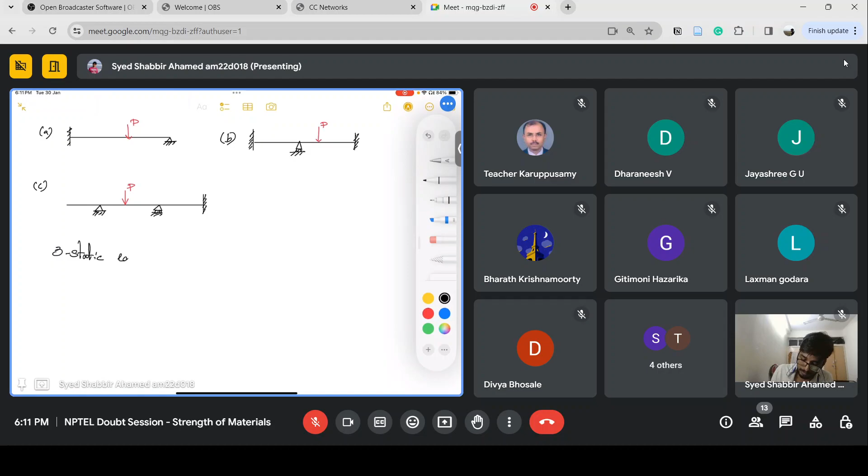So in any beam, since these are all 2D structures, for a 2D structure we'll have three equilibrium equations, three static equilibrium equations. First is sum of the horizontal forces, sigma Fx equals to 0, sum of the vertical forces, sigma Fy equals to 0, and sum of the moments should be equal to 0. So if all these conditions are satisfied, we can say that the structure is in static equilibrium.

So it means that the structure is not moving when the load is applied. So that's static equilibrium, and this is for 2D.

Suppose if we have a 3D structure, then we will have six number of equations: sigma Fx equals to 0, sigma Fy equals to 0, sigma Fz equals to 0 for forces, and sigma Mx equal to 0, sigma My equals to 0, sigma Mz equal to 0 for moments. So we'll have a total of six equations in case of a 3D structure. I don't think we'll be seeing any 3D structures during the course.

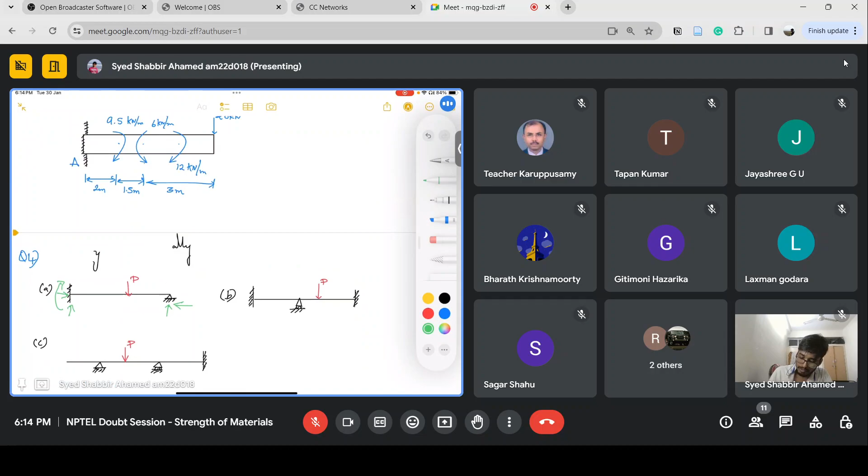So it is not sufficient for this structure to only have static equilibrium equations. That's why this structure is called an indeterminate structure. Total number of reactions is 5, whereas the number of equilibrium equations is 3. So we need additional equations to solve this structure to find out the shear force, bending moment, or the deformation of the structure. That's why it is called a statically indeterminate beam.

So the second one, can anyone tell me how many reaction forces are present for the B type of structure? This part B, this beam. You can see the screen, and if you have notes, you can draw and let me know how many reaction forces are acting on this structure. If anybody has any answer, can turn on your mic.

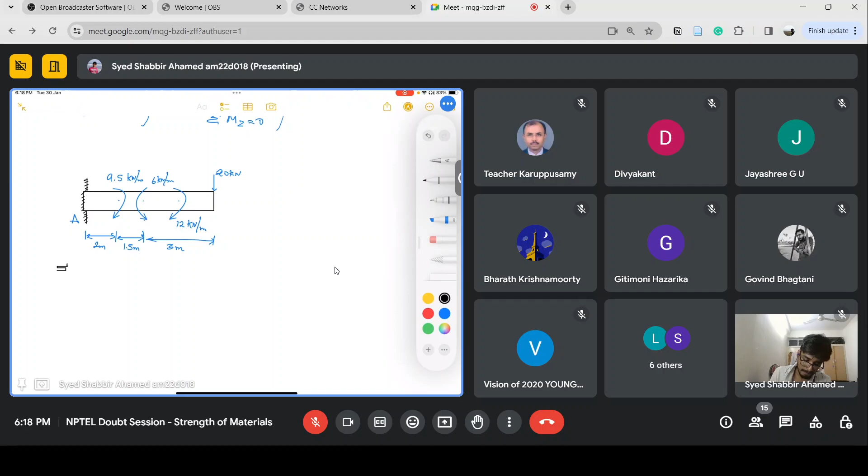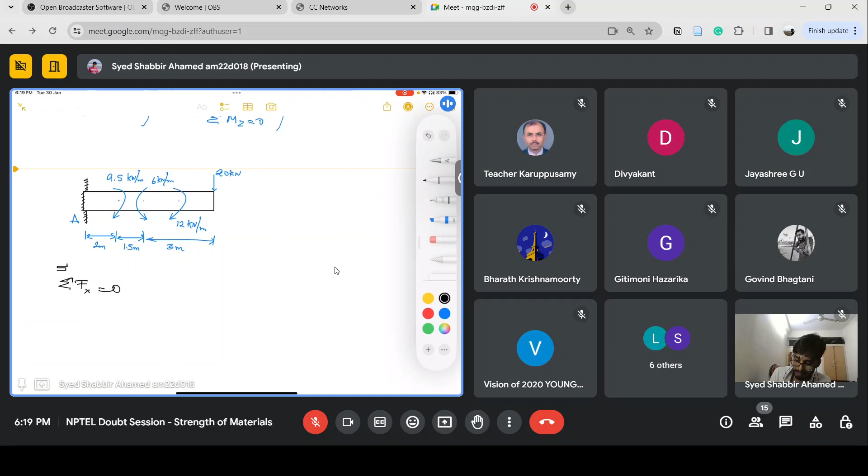So this is a structure, and here we have to find out the net reaction, moment, and force at the support. Let's start with the first thing we have to do. Because this is a 2D structure, we will have three equilibrium equations: that is sigma Fx equals to 0, sigma Fy equals to 0, and sigma M equals to 0.

This is actually moment in the z direction, so you can say sigma Mz equals to 0. Let's say this is the plane of the structure, so this is in the xy plane. If I apply any moment, this moment will be about the axis which is inside the paper. If you say the screen is the plane, you can see this pencil represents the z axis. So the structure will have moment with respect to this axis. This axis you can't see in the paper; it will appear to you as a point. So that's why this moment is moment about the z axis, hence sigma Mz equals to 0.

Here, because we don't have any horizontal forces in the structure, you can simply remove this equation, or you can keep it, depending on the sophistication you want. We can simply remove this because there aren't any horizontal forces acting on the beam. So you can simply say this is not required. But if there is any inclined load acting on the beam, or any horizontal load acting on the beam, then we will require this equation. But if you use it anyway, you'll still get the correct result.

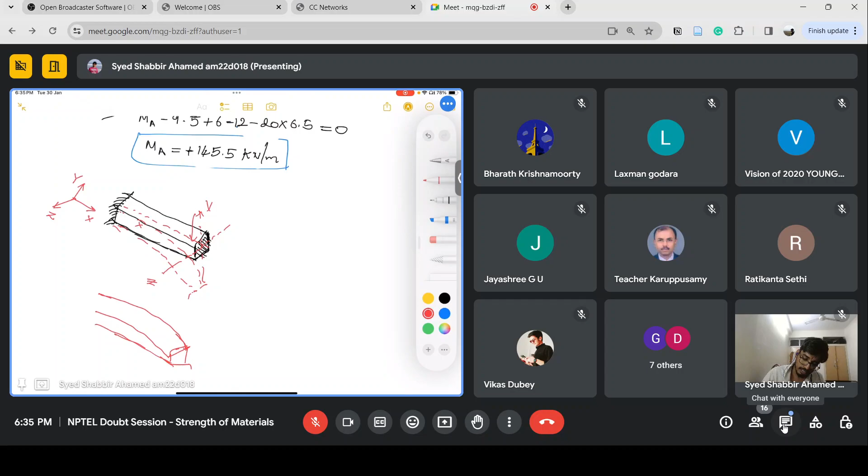Or let's say if I take this same thing in 2D, so this is the cross section initially. After the beam has been deformed due to the applied load, the beam will rotate like this, right? So here you cannot see the z-axis, but here you can see the z-axis in the 3D. So this is the z-axis. If I am applying any load, this cross section is rotating about this z-axis.

So that's why the moment here is taken in the z direction. I hope this diagram is clear.

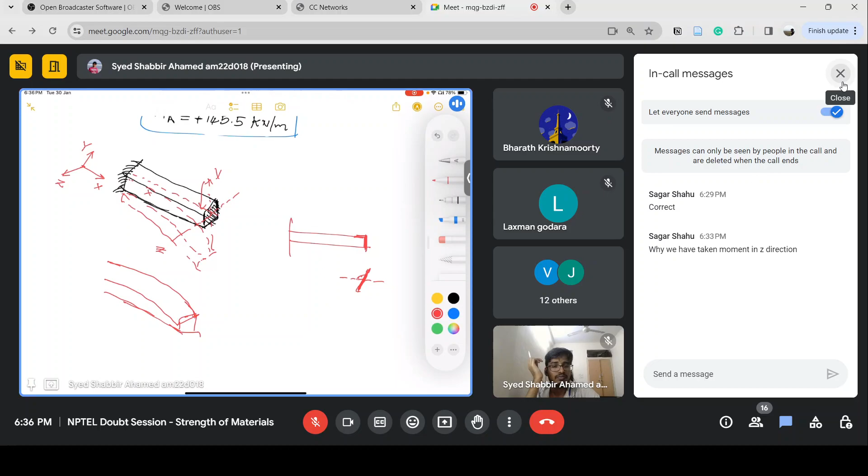Are you getting it, Sagar? Sagar Sahu... yeah, just try to imagine it.

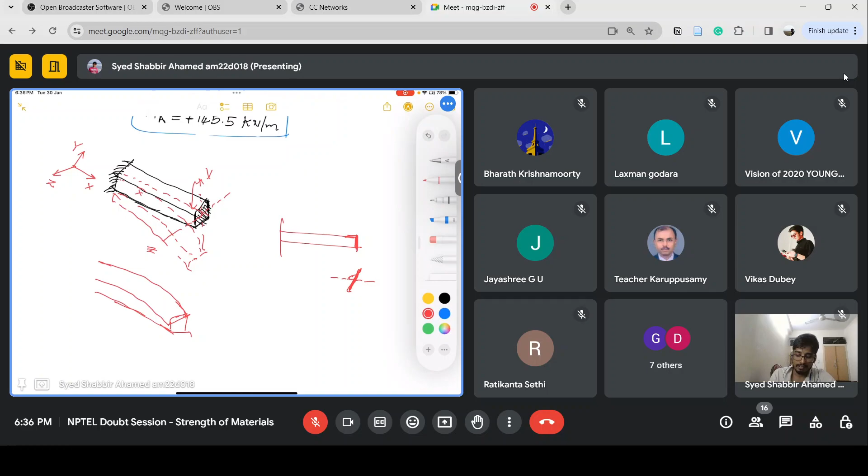My diagrams, I think, are not that good, but I'll try to improve during this course. This is the first time I'm using an iPad, so I think I'll try to improve. So I think you got it, like why we are taking the moment in z direction.

So here you can't see it, the z-axis in a 2D structure you can't see. This is the point here. So the z-axis goes through this point. And the beam bends in this direction, so it is bending around the z-axis. That's why we take the moment as moment in z direction.

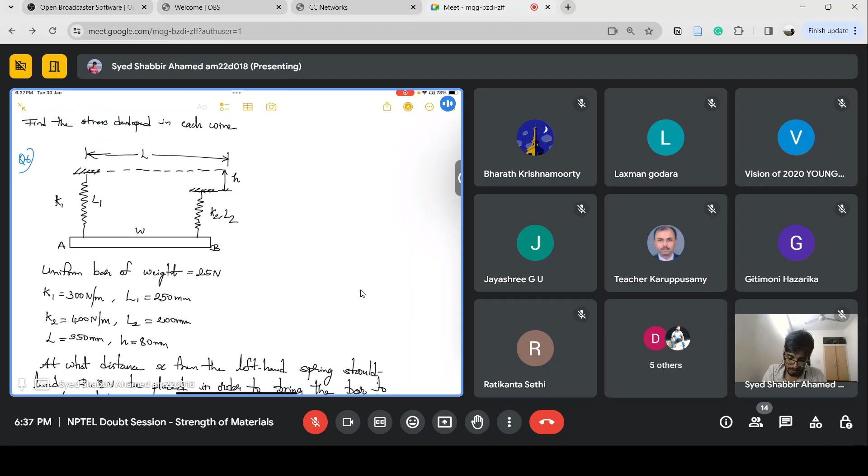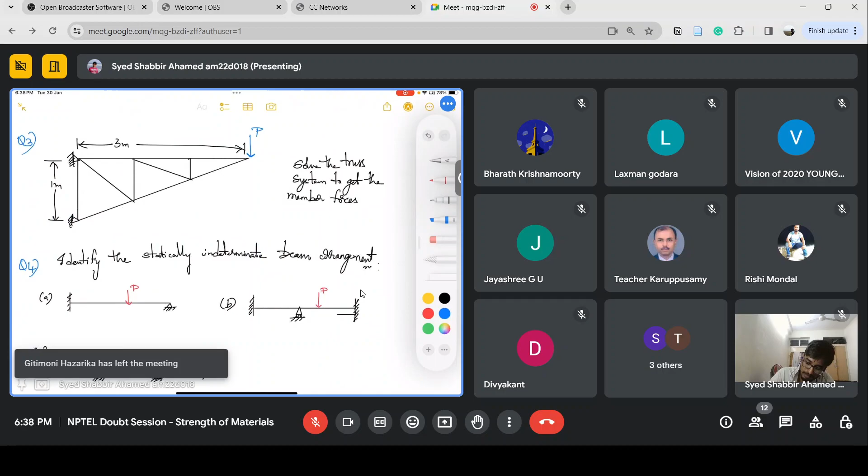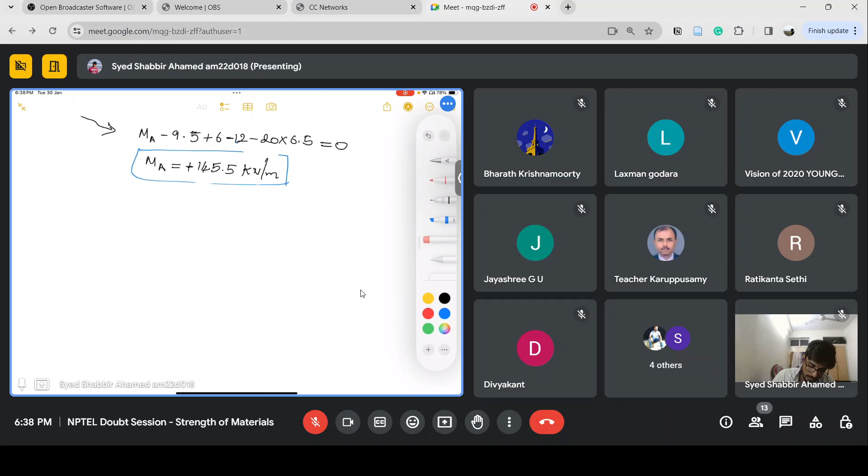Okay, so I think we'll go with this question. Second one, just copy this. So the question is here, we have to get the... so here we have to find the shear force diagram and the bending moment diagram.

So I hope you all know the concepts of shear force and bending moment, and you might have watched week one. So I'm directly going to get this. So before trying to get the shear force or bending moment diagram, we have to first get the reactions of the structure which are acting on it.

So at the support, there are two supports, B and C. So we have to get the reactions at B and C. So here we have a hinge support. A hinge support will give us two reactions. One is a horizontal reaction.

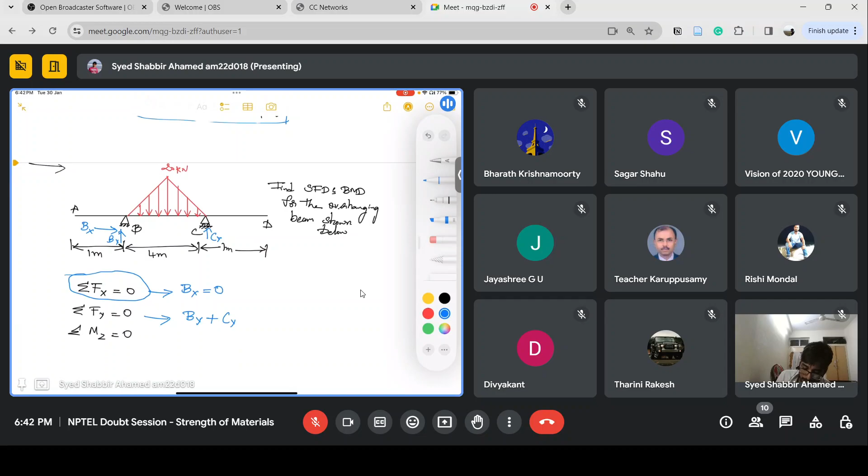There are three vertical loads which are acting: this By reaction at B, reaction at C which is the vertical reaction at C, and this uniformly varying load which is acting. Because the load is acting in the downward direction, we have to take this as a negative load. And there is a small correction here.

This is not 20 kilonewton, it is 20 kilonewton per meter. This is because this is a distributed load, that's why I am taking it as 20 kilonewton per meter.

It is acting in the negative y direction, that's why I'm taking it as negative, and I want to get the total load acting on this structure due to this uniformly varying load. I have to get the total area of this triangle. If I get the total area of this triangle, I can get the total load acting on the beam, because this is a triangle.

Area of a triangle, you can write it as half into base. So this is the base, which is 4 meters, and the height of this triangle is 20 kilonewton per meter. The unit of this is meter, and the unit of this is kilonewton per meter. If I multiply both of them, the meters will cancel and I'll get the load in kilonewton instead of the uniformly varying load.

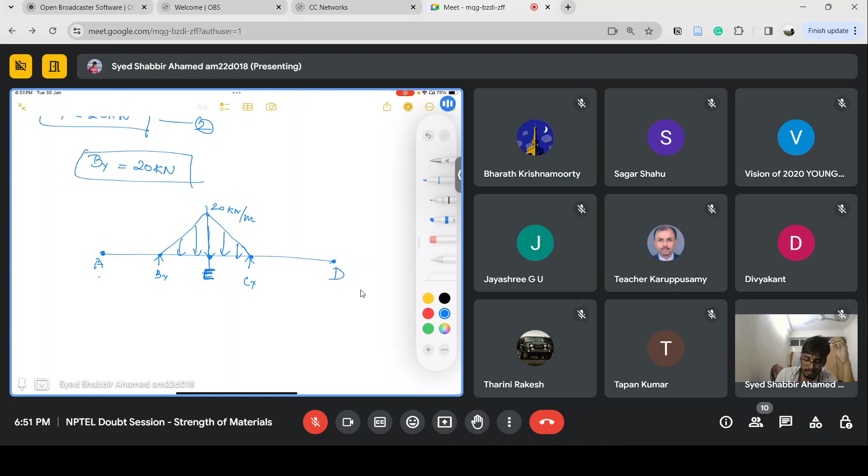Here we will find out the variation first in section AB, then we will go to section BE, then section EC, and then section CD. This is because there will be jumps occurring in the shear force diagram at the point where there is load acting, and there will be a jump occurring in the bending moment diagram at a point where there is a moment acting.

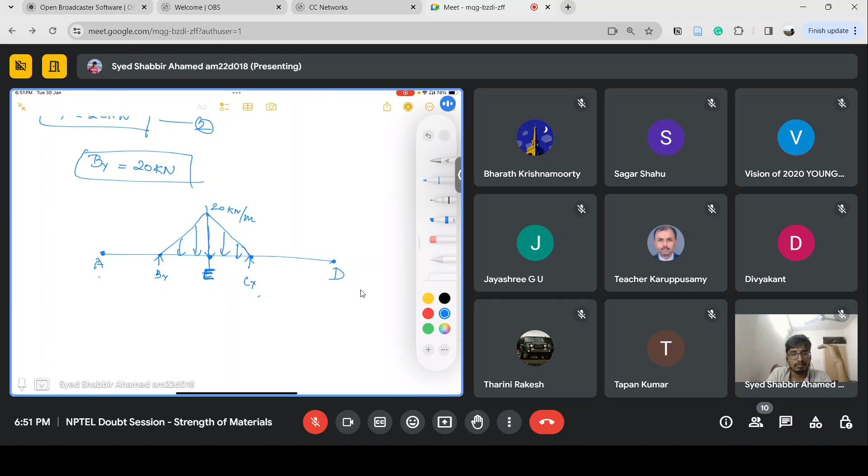In order to take account of that, first we have to take a section in the segment where there is no variation. So if from A to B there is no load acting, I can take a section here and find out the shear force and moment diagram.

Whenever you come to B, there is a load acting here due to the reaction, so there will be a change in the shear force diagram. That's why you have to take a section again here between B and E. From B to E, there is a variation from 0 to 20 kilonewton, so this is one kind of variation.

So you have to take a section here. Again from E to C, there is a variation of 20 to 0, so again you have to take a section like this. We have to divide this into segments, and do the shear force and bending moment calculations.

Let's say first we will take the section AB. First I'll go with all the shear force calculations. So, shear force variation in AB.

In AB, if I take a section here, I'm just cutting a section. So from A, this is the section I have cut. There are no forces acting here, and there is no reaction at point A.

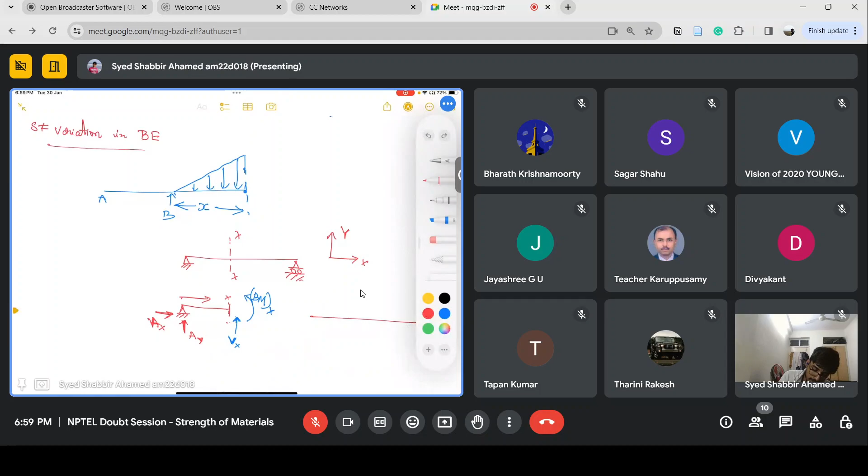So suppose if I take the section again like this. Before this I had taken this section, and now I am taking this section, so I have cut the beam into two parts. This is a roller support, and because from here I am going in the negative x direction and cutting the section, this is called negative face.

That's why we are going to use this. The reaction, I am assuming it is acting upward, that is positive. Because when we are going in the negative side, we are going to assume that shear force is acting in the negative direction, since this is negative face, and the bending moment is also acting in the clockwise direction. So we are going to assume like this - this is negative face, and we take the shear force and bending moment in the negative directions.

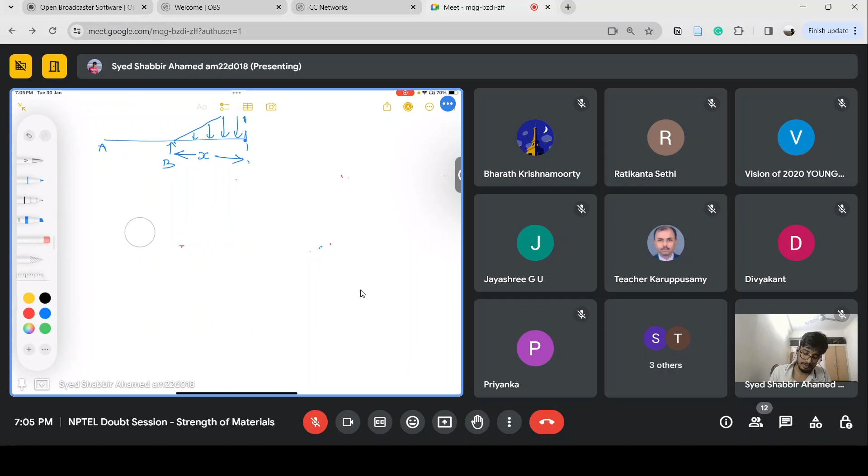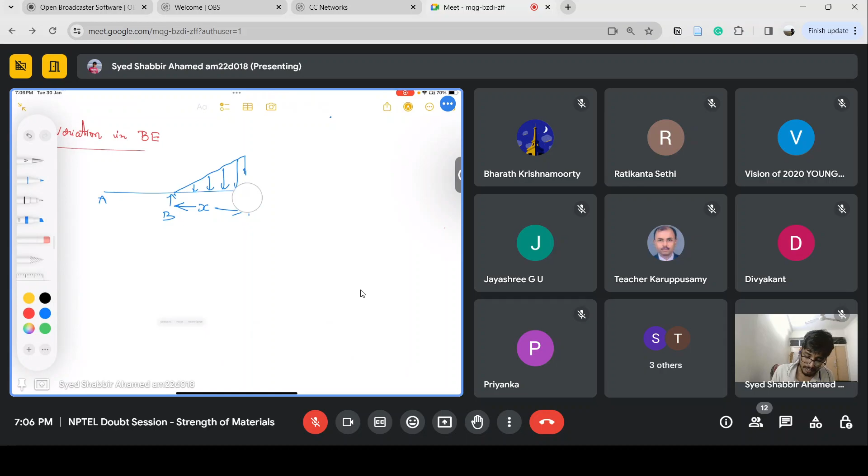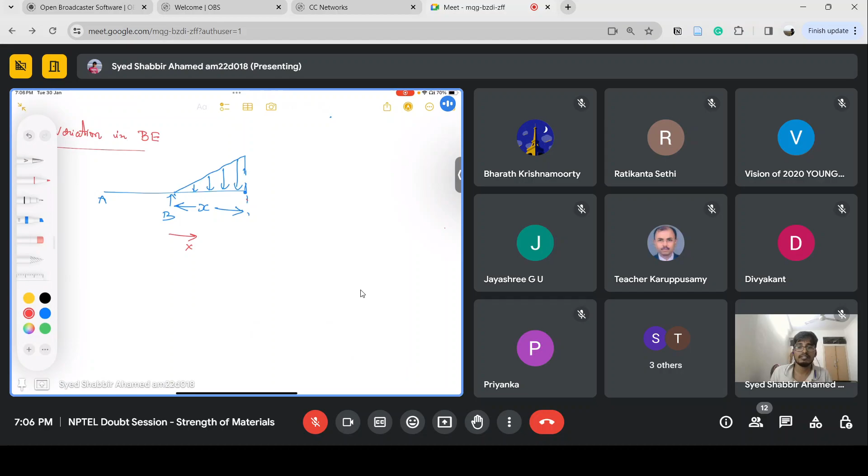In this problem, I have cut the section here, and because I'm coming in the positive x-axis direction, I'm cutting the section here. That's why this is the positive face, and in the positive face, I'll take shear force as Vx and bending moment as Mx. So I'm just going to calculate the shear force, and then the bending moment at x. These are the directions which I'm taking.

So what is shear force? Shear force at any section is the sum of all the forces acting on the structure till the section which we have cut. So till x, whatever is the sum of all the forces acting, that is called the shear force.

So in order to get shear force, we have to take sigma Fx equals to 0 for this cut section. We have only By here, and we have Vx also acting in the upward direction. That should be equal to 0. In addition to this, there is also this load.

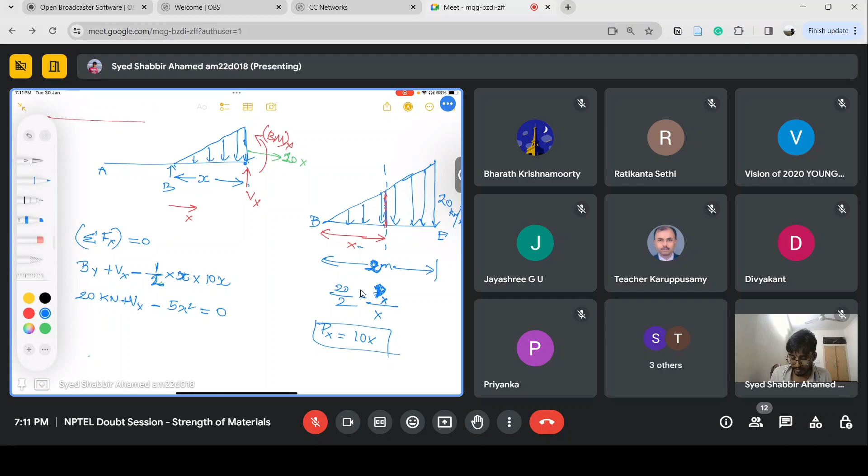So you can get, by what we have already calculated, 20 kilonewton plus Vx minus 5x square. So if you take this, Vx equals to 5x square minus 20 kilonewton.

Is this clear? I think it should be, otherwise you can ask me. So this is the shear force variation in the section, in the segment BE: 5x square minus 20. So from B to E, this is the shear force variation.

Let's say you want to calculate the shear force at E. Since it is at a distance of 2 meters from point B, I'll substitute x equals to 2, and I get 5 into 4, which is 20 minus 20. So the shear force at this point is 0. I hope you have understood this — this is the shear force at point E.

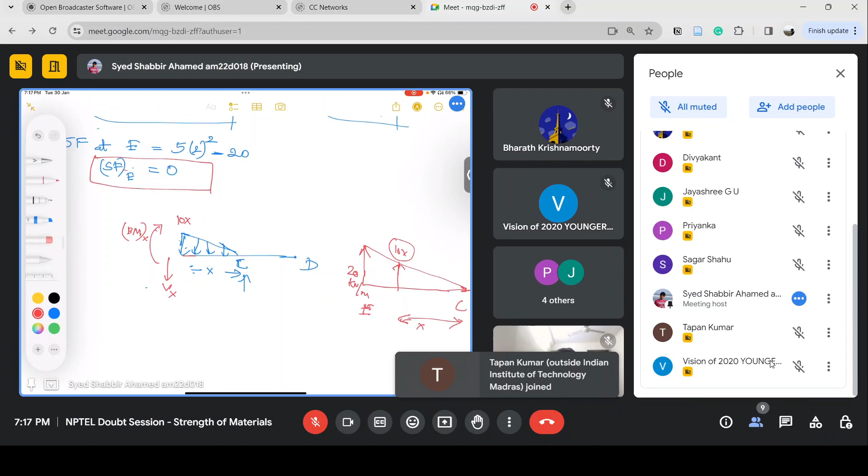So again I am going to take sigma Fy equals to 0. Again, I am taking Cy acting upwards, and there is Vx acting in the downward direction, and there is half into 10x into x. So if I substitute Cy is 20, I'll get 20 minus 5x square, which is the shear force at section x.

So this is the shear force variation which we have got in the section C and E.

So if I want to calculate the shear force at point E, I'll just substitute, and I'll get shear force at E equals to 0. So at any point on the beam, shear force should be the same. But there can be a jump, so if there is a load like a point load, there can be a jump.

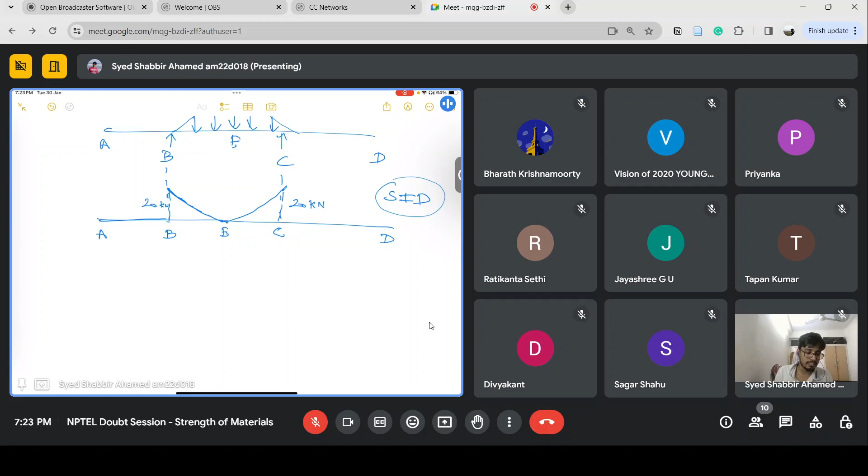So now coming to the bending moment, as I have explained, I don't need to calculate between segment AB and CD, because there if I take a section there are no loads acting, no forces act, no reactions present. So the bending moment in that part will be 0. So we don't need to do that again.

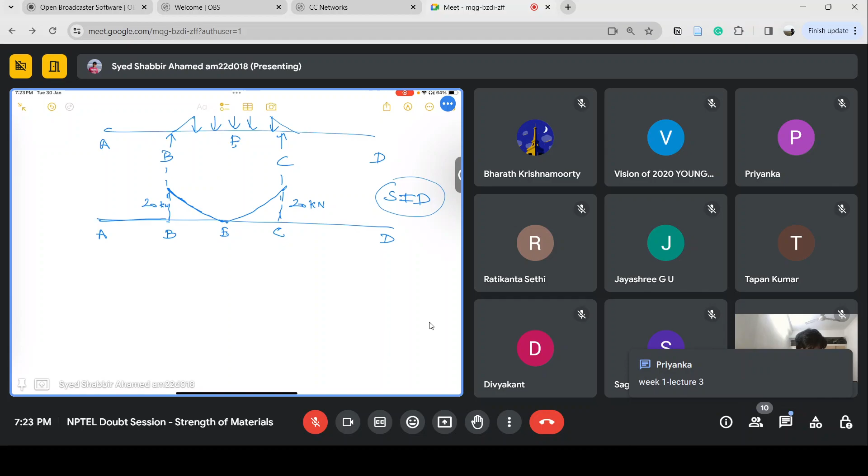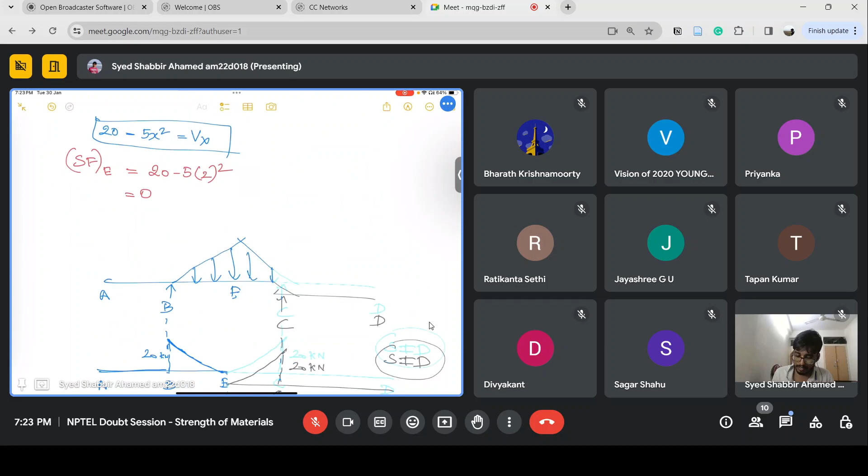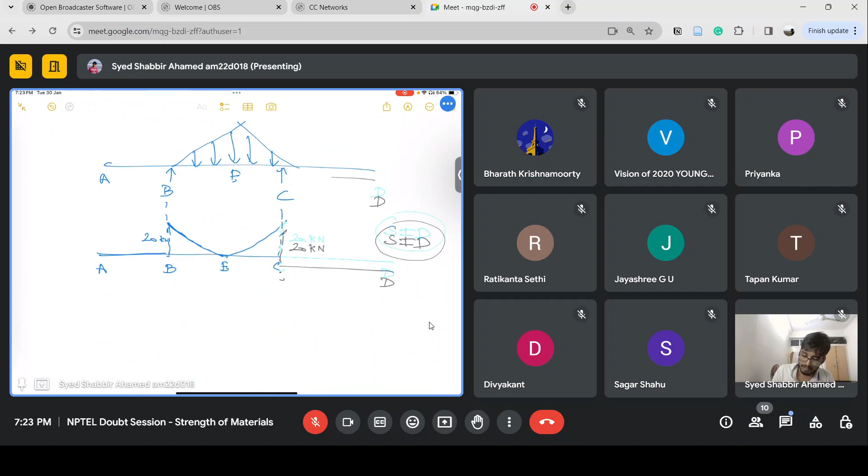So instead of that, we can just go for section BE. So from section BE, I'll just write the bending moment diagram. So bending moment variation in BE. If I take, as I said, this is 10x. I'm taking a distance of x from point B. So what is bending moment?

Bending moment is nothing but the sum of all the... I'll just write the sign conventions. So bending moment is the sum of all the moments acting on the structure till that section. So till section x, whatever moments occur in our structure, that is the bending moment. So if I take...

For bending moment, I simply have to take the sum of all moments in the z direction at point x equal to 0. I am calculating moment about this point x, so I don't need to take Vx because it is passing through point x. So basically I have By acting in the anti-clockwise direction at a distance of x, and I have...

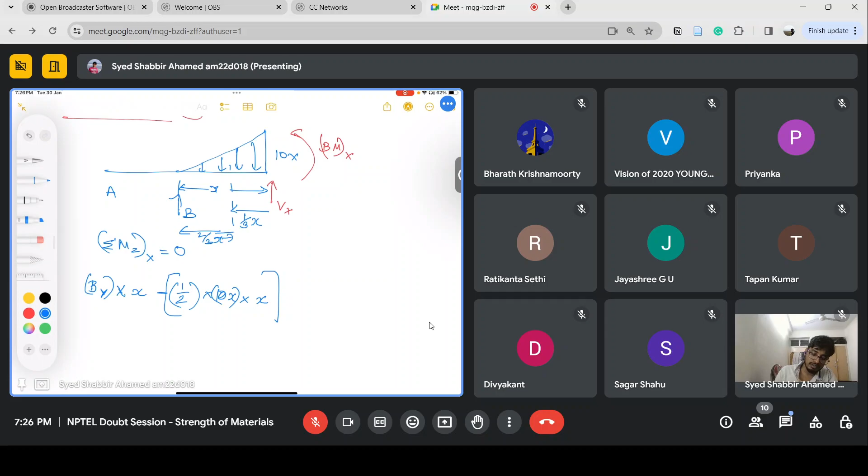Due to this load, half into 10x, the area of the triangle will give you the total load, and this is acting at a distance of one third of x. The centroid is present at a distance of one third of x from this side. If I come from this side it is at a distance of two thirds. Since I'm taking moment about point x, I'm just taking one third of x.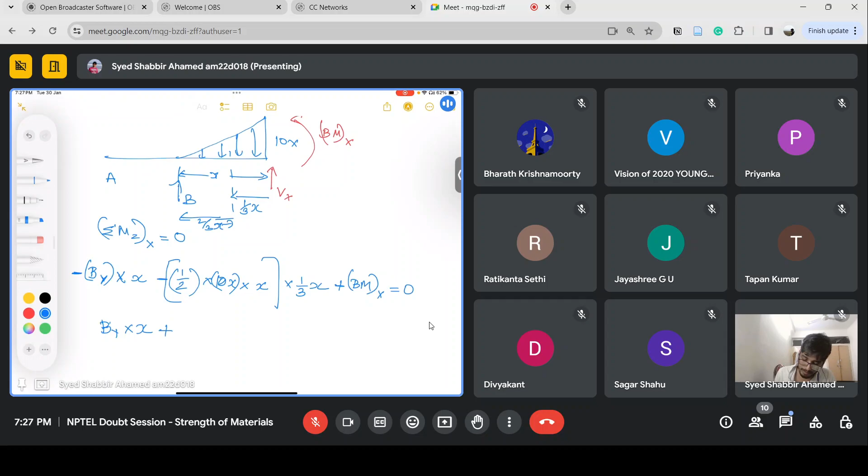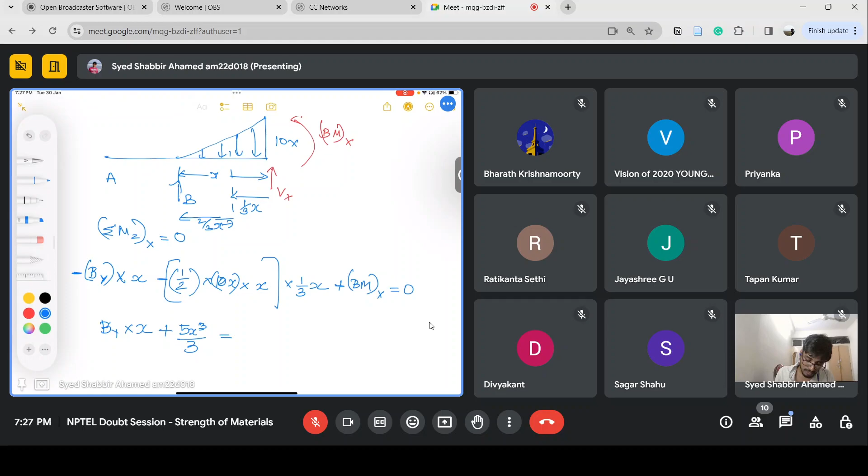So this is the moment due to the load, and this is the clockwise direction. The moment due to the reaction gives bending moment at this point, sum of moments equal to 0. If I do this calculation, we get By into x. I'm taking everything on this side, so negatives become positive: 5x squared, x cubed by 3, is the bending moment at x.

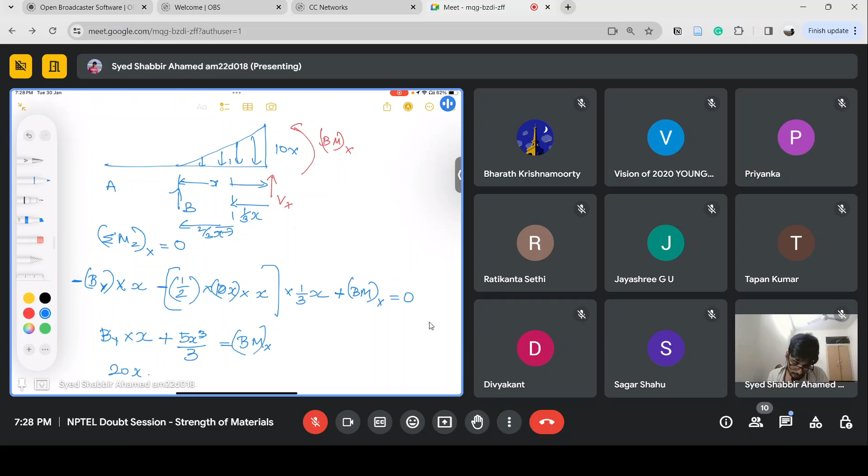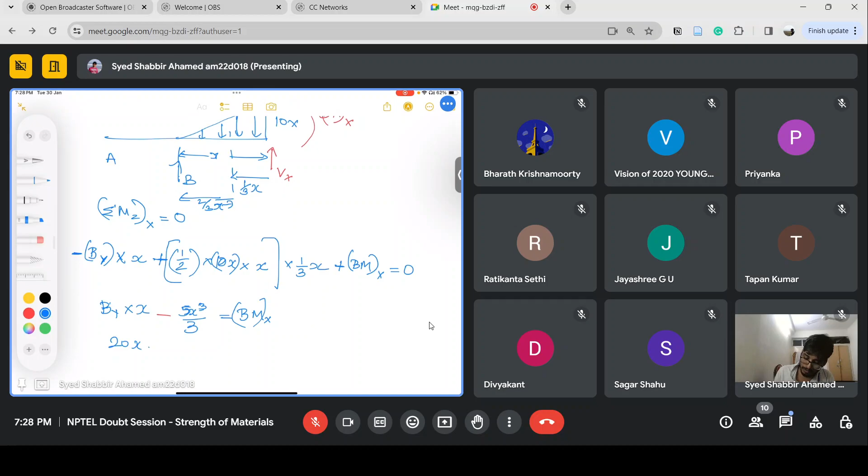So By is 20x. This is positive because the moment is acting in the anti-clockwise direction due to the load, that's why it's positive here. So positive becomes negative here: 20x minus 5x cubed by 3. So this is the bending moment at section x.

So if I want bending moment at point E, I simply substitute 2 here because E is present at a distance of 2 meters from point B. I'll get 40 minus 40 by 3, which is simply 80 by 3 kilonewton per meter. This is the bending moment at point E. If I want bending moment at point B, I put 0 because x is 0, so bending moment at point B will be 0.

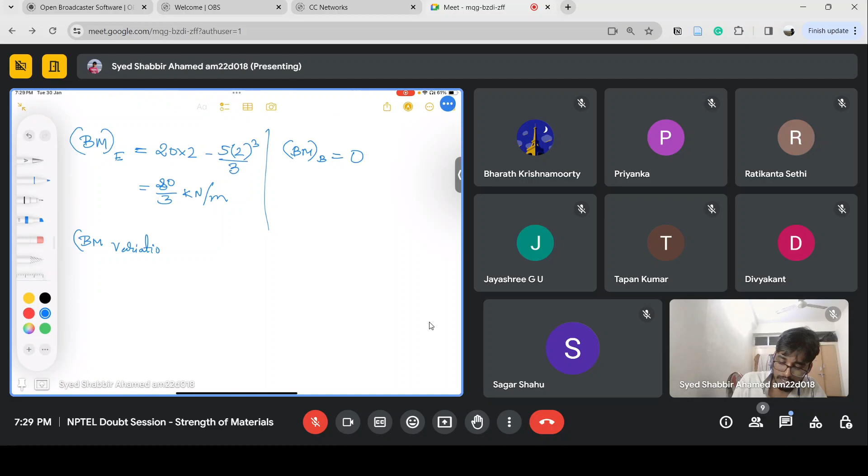Similarly, you can get the bending moment variation in EC. Same thing, you have to go through again. So this is distance x, and this is C, and this is D.

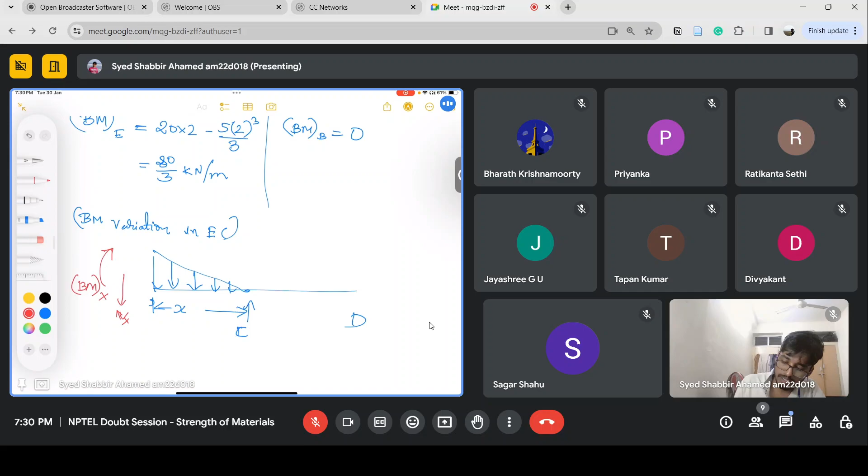As I have said, we are taking clockwise as negative direction, so bending moment will take clockwise. If I take the moments, bending moment at x, because this is clockwise, and about moment about x I am taking - so this is clockwise, and this is due to the load also. We have half into 10x into x, again acting at a distance of 1/3 from the face of the triangle, and due to the reaction we get cy into x, because this is acting in the anti-clockwise direction.

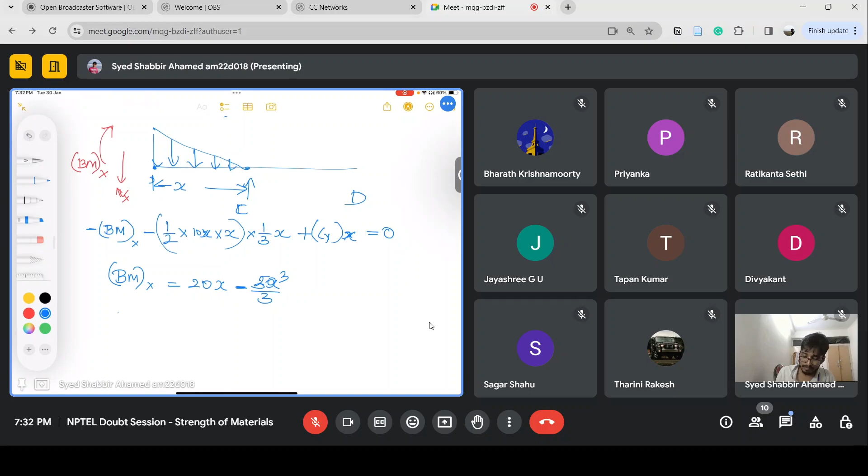So if I substitute x equals to 2 here, in order to get the bending moment at E, I again get 80 over 3. And if you want to get bending moment at C, you just have to substitute x equals to 0, and again you get 0.

Now I can draw the bending moment diagram. A, B, C, D, and this is E. So bending moment at C and also E,

so this is 0 at this point, and it will come like this, maximum at this point, and come like this. So this is what the bending moment diagram will look like.

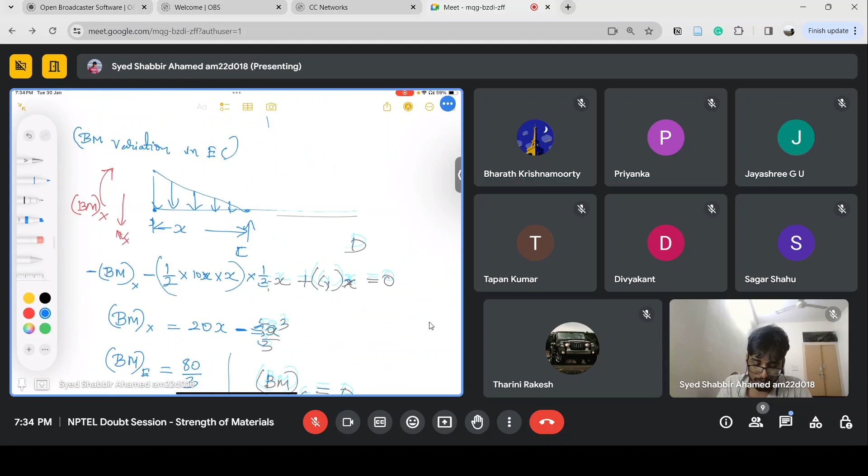So bending moment is maximum at point E, which is 80/3 kilonewton meters. Shear force is maximum at point B and C. So here it is 0, and here it is 20 kilonewton, 20 kilonewton. So at supports the bending moment is 0, and at point E, bending moment is maximum.

So that's how we are going to get the shear force and bending moment diagrams.

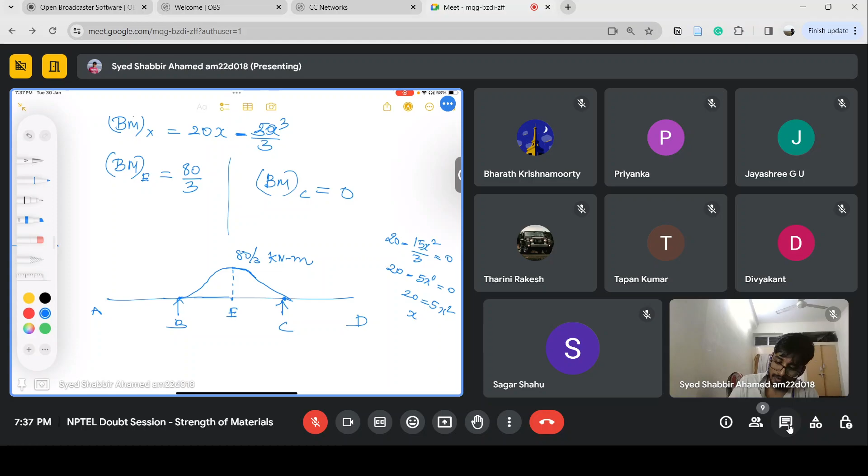Yeah. Slide change. The diagram will look like this. So this is the bending moment diagram. Okay.

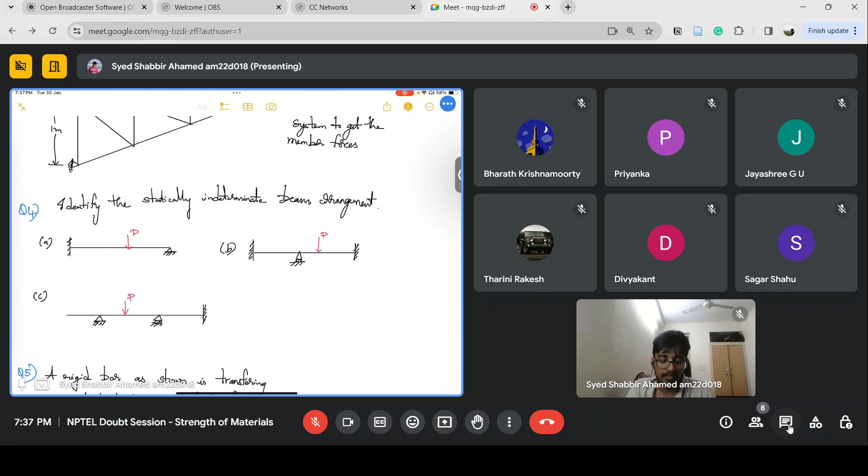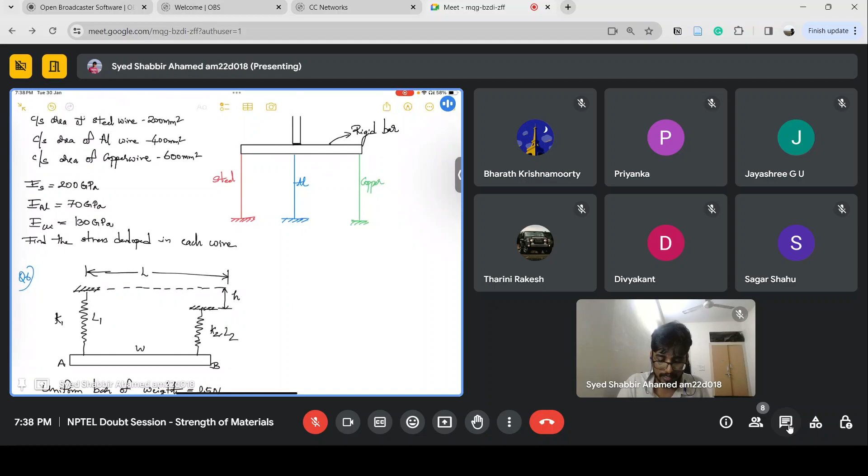I think you are getting an idea how to solve this problem. And I think you all would have gone through the engineering mechanics course and calculated truss problems. I think you have done the truss problems.

If anybody has no idea how to solve a truss problem, please you can tell me. I can just show you once.

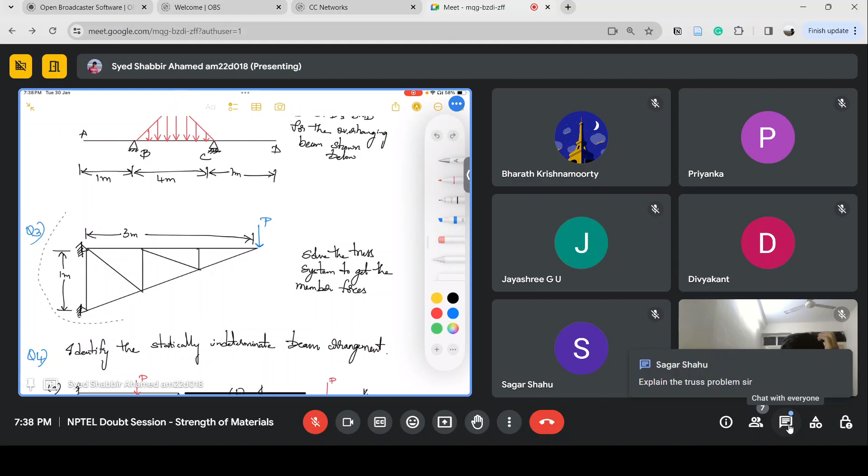Okay, I'll just give an idea. You can do this because I'll tell you how to take the sign convention. Here also this part comes in, where you have to take the sign convention.

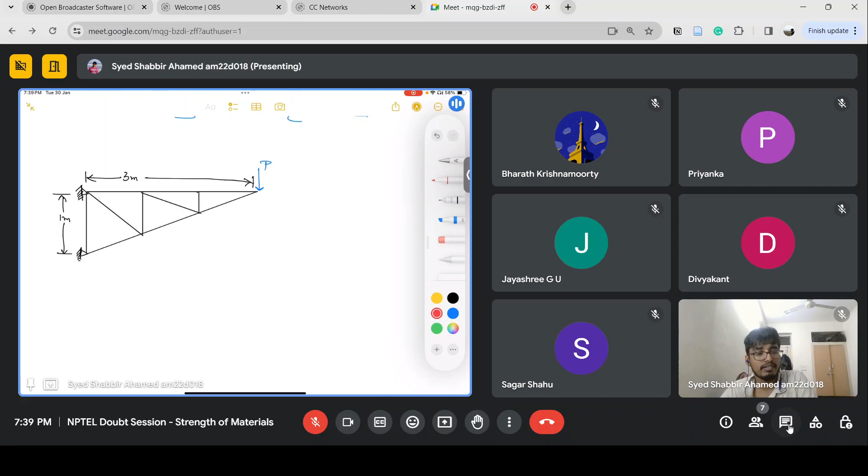So in the truss problem also, if you want to find, okay, in the truss problem also we want to find what are the member forces acting in the truss. So let's say this is joint A, this is joint F, and this is joint G. So there is a load acting here.

There is a load acting at point G, at joint G. So these are all the joints. Whatever I am highlighting with the red dotted thing, these are all the joints which are joining the truss members. So this is one member, this is one member. All these slender members are joined together to form a truss.

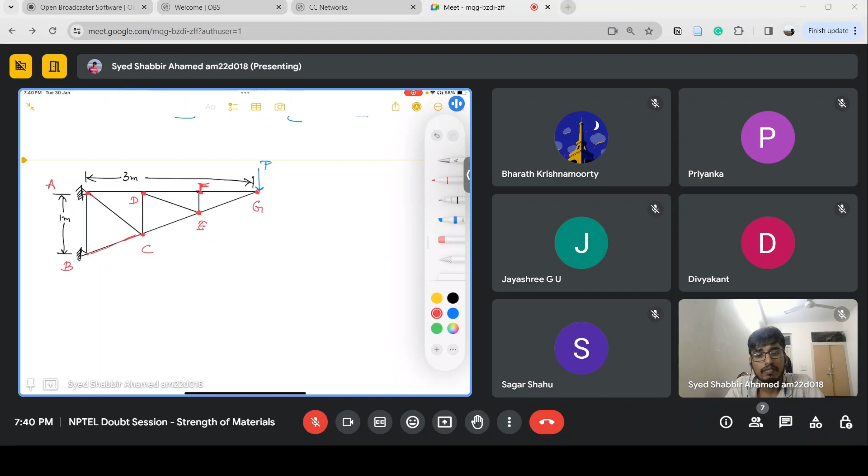So we will assume that truss members will have only axial reactions. In general, in real life, there will be bending moment and shear force also in the truss members, but to simplify our discussion, we will assume that truss members are only able to handle tension and compression.

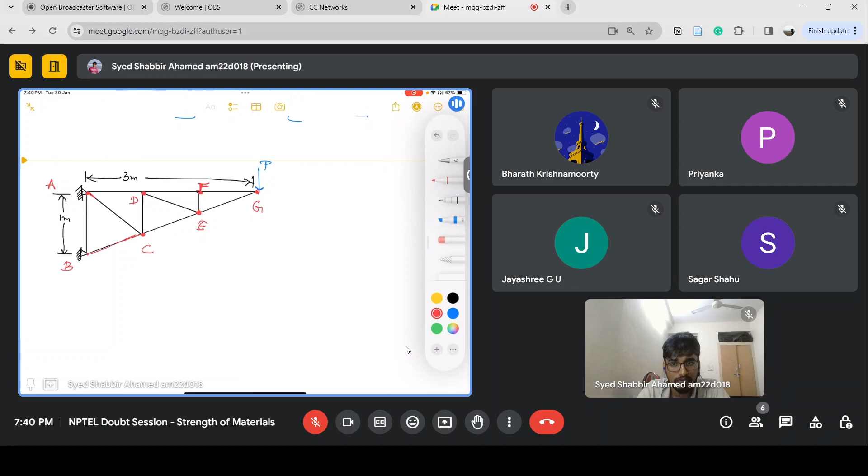So for any problem, whether it is a beam or a truss, first we have to find out the reaction forces. So here there is AX, there is AY because this is a hinge, and also there is BX and BY. So there are four reactions which you have to find out.

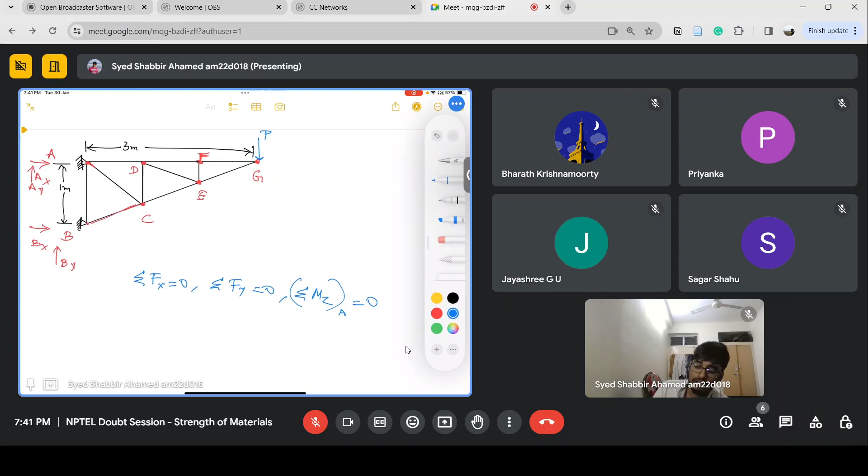Okay, simply you can use the equilibrium equations: sigma Fx equals to 0, sigma Fy equals to 0, and sigma Mz about point A equals to 0. So if I take sigma Fx equals to 0, I get Ax plus Bx equals to 0. And if I take sigma Fy equals to 0, I get By plus Ay equals to 0.

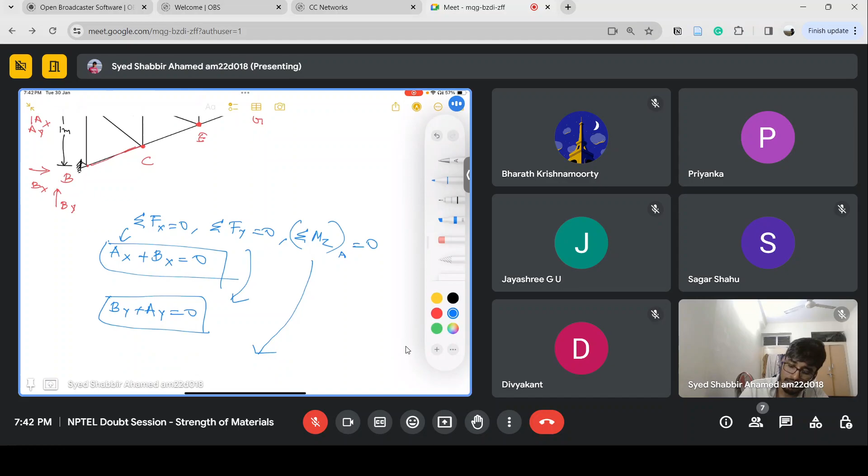And we can also have this moment equilibrium equation about point A. For y direction, it will not be 0. Oh yeah, sorry, only in the x direction it is 0.

If I take moment about this point, the force By passes through this point, the force Ay passes through this point, the force Ax passes through this point. So I won't get moment about this, I won't get any moments due to these forces about this point. So we'll only have Bx, which is acting in the anti-clockwise direction.

Bx is at a distance of 1 meter, and there is P which is acting in the clockwise direction, at a distance of 3 meters from A. So simply I'll get Bx equals to 3P.

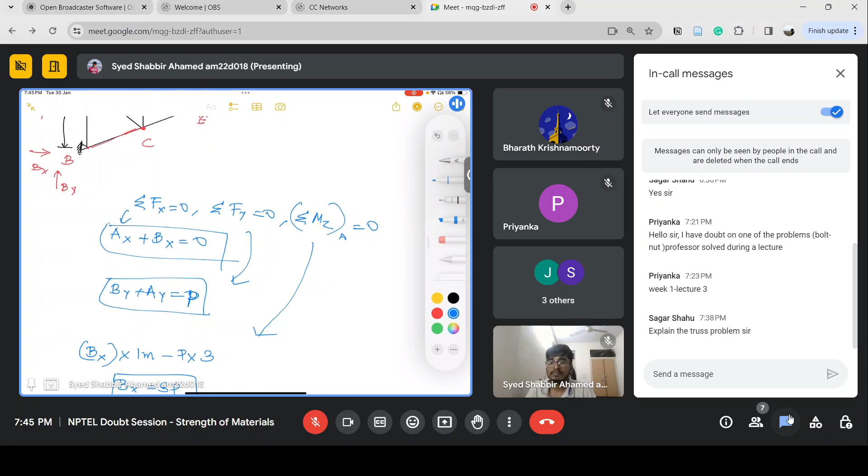The reactions Ax and Bx, simply I think we can go from this point. We have got Ax and Bx, so BY and AY, and you can take another moment, you can calculate about any point, or simply by calculating the member forces starting from point G. If I go like this, I think you will be able to get it.

So first, in the truss problem, there are two ways to solve a truss problem to find the member forces. One way is the first method, called method of joints, and the second method is called method of sections.

Method of sections is useful when you only have to find out the member forces in some members. Let's say the examiner has asked you to find out the member forces in DE, or only DE, DF, or C, something like that. Only then can you cut a section and do the method of sections.

But here, this is a little bit different, this is not a simple, straightforward problem. I think I won't explain it today, because you need to again go from here to here, there is a lot of... I think we are left with only 10 minutes of time.

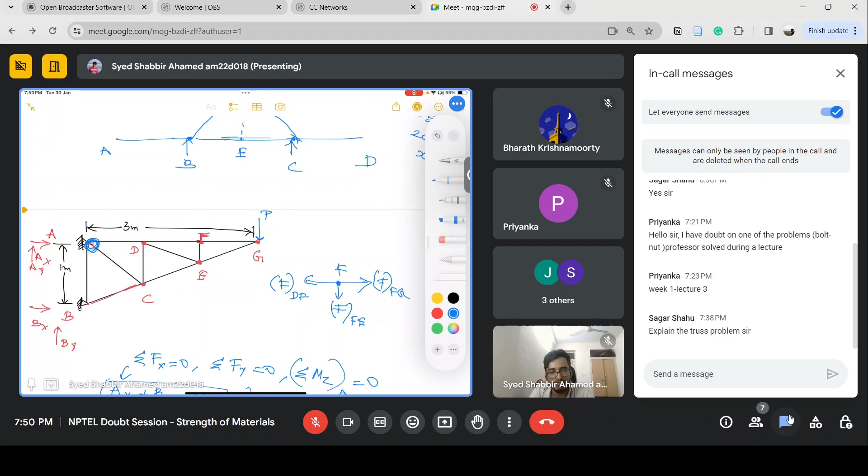Take equilibrium equations at each joint, and you can calculate all the member forces. So this is the way how you do a truss problem. I have just given a summary. You can just solve some problems from any book or lecture, I think that would be good.

Someone has asked a question about week 1 lecture 3, so I'm just going to check what that question is. May I ask the question, sir? Yes. Sir, in that week 1 lecture 3, sir had solved a statically indeterminate problem, the bolt and nut problem.

In that, he had taken the total deformation as delta sleeve plus delta bolt. But in that, the sleeve is getting contracted and the bolt is getting expanded. Why did he not take the sign differently? Oh, I'll just check that one. Yes.

Okay. One concept, okay. Yeah, I haven't watched this lecture. I think I can't watch it right now.

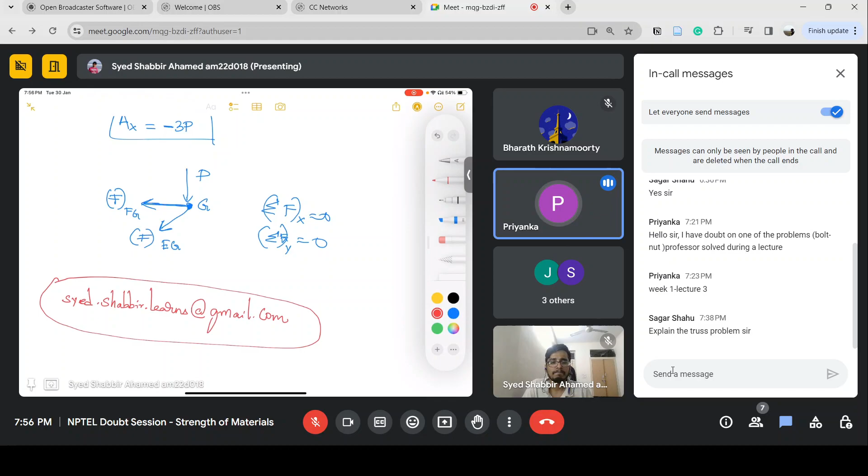So one more doubt, sir, I have. Sir, regarding free body diagram for a beam. If I take a propped cantilever beam with an internal hinge, and a concentrated load is acting on the internal hinge, so if I want to find the force and I take two free body diagrams, I have a doubt on whether I should consider load P on both free body diagrams or only one.

The thing is, you can consider it on one, or you can consider half load on each part. Either like it will be P by 2 on the fixed free body diagram and P by 2 on the simply supported, or else P on fixed and 0 on the simply supported. You can do it both ways.

Okay sir. And last doubt, sir. While solving some other statically indeterminate problems, sir, like the steel reinforced concrete beam, that bar problem, sir, in that, while solving, we do the force equilibrium, no sir, like F is equal to... we will equate the force. Similarly, can we equate stress also?

I didn't understand your question. Like, if there is a steel reinforced concrete problem, then we take the total force equal to force on concrete plus force on steel. Can I also take it as total stress equal to stress on concrete and stress on steel? No, no, no, stress is different. Stress is actually distributed, right? You cannot take that. You can only take sum of forces. Stress is not that straightforward, you cannot sum it.

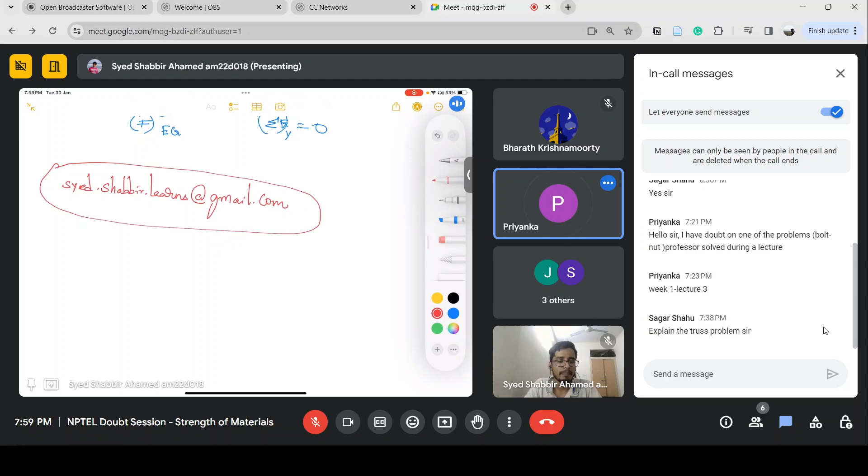And other questions, I think you all can do them. These are basically compatibility problems, like a rigid bar. This fifth question I'll just explain how you are going to do it.

Because this 200 kilonewton load is applied on this bar, we have three supports: steel wire, aluminum wire, and copper wire. Because these are parallel, acting like parallel springs, the deformation will be the same in all the springs. So you can take deformation at all the springs as equal, and you can solve this problem. I think you have this.

First, take deformation in steel wire equals to deformation in aluminum wire. From that, you get some relation, and again deformation in aluminum equals to copper. From that you get another relation, and the sum of all the loads experienced by steel, aluminum, and copper wires should equal 200 kilonewton. So P steel plus P aluminum plus P copper equals 200 kilonewton. From that you get the loads.

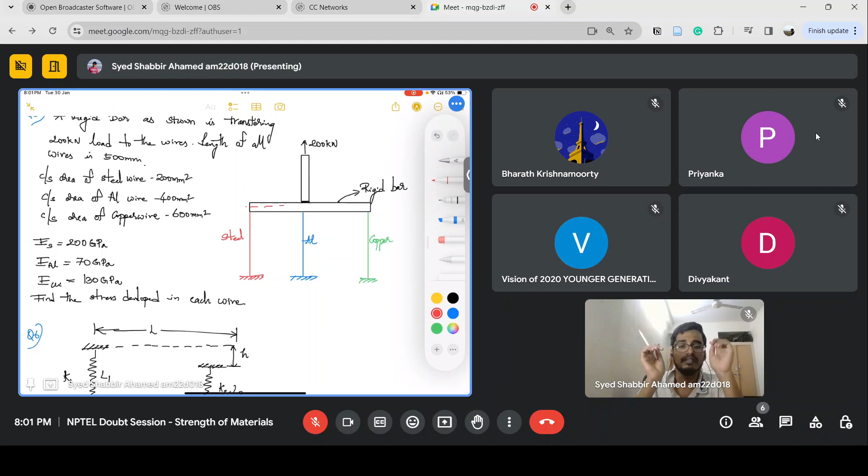So this is also a statically indeterminate problem, but a simple one. I think you can solve this. You just have to find out the distance at which deflection in both the springs should be set.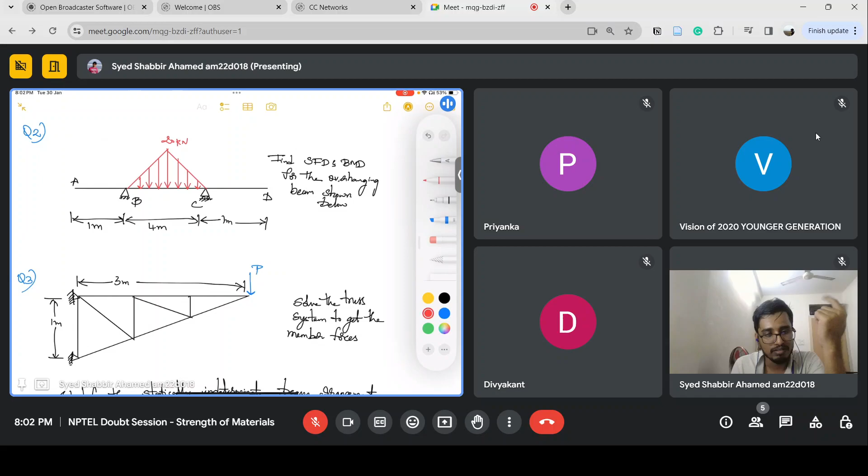The thing is, you should take any joint such that there are only two unknowns. Because we have only two unknowns, first we take this joint - there are two unknowns, member force in this and in this. You solve using the equilibrium equations, you get two, and again you go here, here, here. By doing this, you can get the member forces.

Always assume that forces are acting away from the joint. If you get the force as positive, that means the member is experiencing tension. If negative, the member is experiencing compression. That is the way - going from one joint to one joint to one joint, you can solve this.